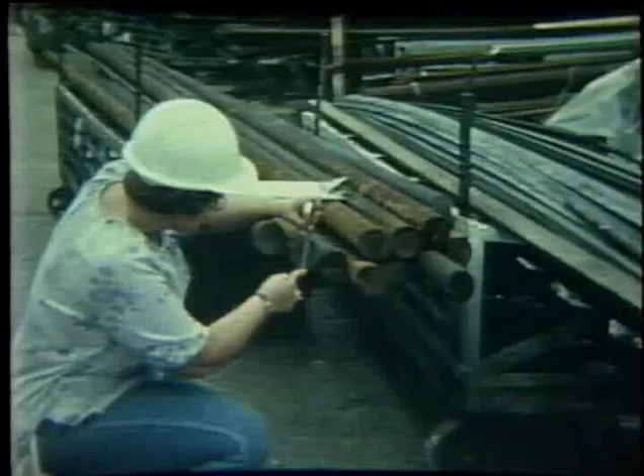Weld quality depends on understanding and ensuring that the materials specified for a job are used. The weldability of metals depends on many factors, which include physical properties, alloy content, welder appeal, and the ability to meet the specified service requirements. Because of these, it is important to be able to identify the types of metal before they are used in fabrication. Let's look at a piece of bare metal.

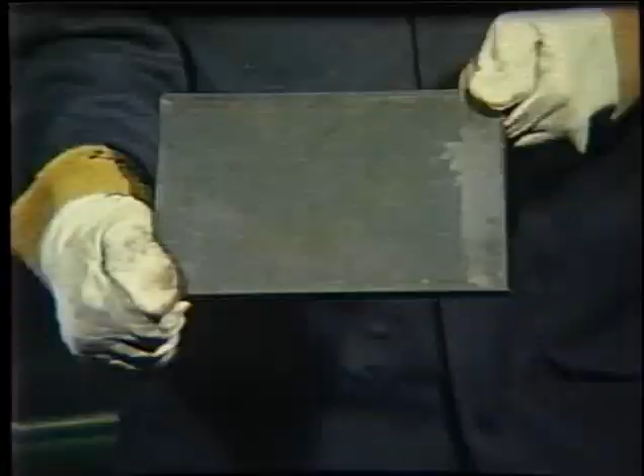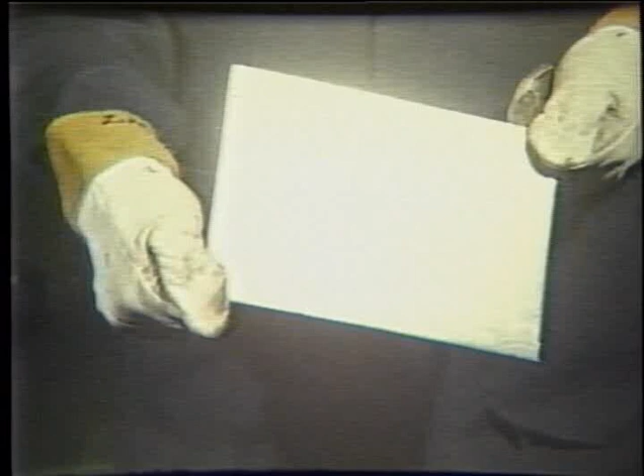It may appear brownish and dull, or it may appear grayish and shiny. Color is one of the physical properties of a metal. Now, lift a piece of metal. It may seem to be either heavy or light. This property is referred to as its density. A bar of steel is more dense than a same-sized bar of aluminum, and is therefore heavier.

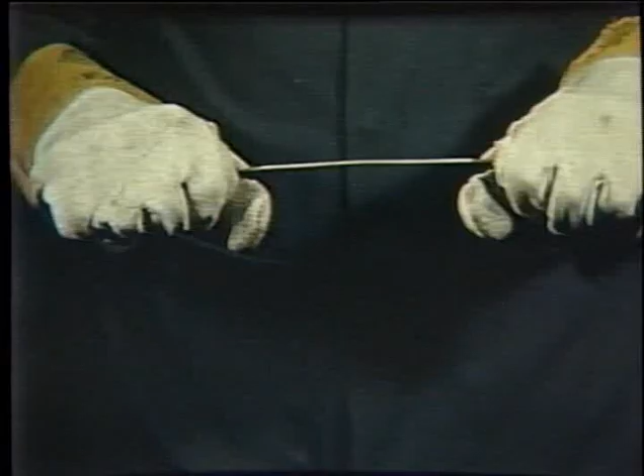Now, try to bend a thin piece of metal. It may bend with little effort, or it may resist bending. The ability to bend or twist without breaking is known as ductility. Metals have many other properties which help to classify them, but for the purpose of this discussion, we will concentrate on the mechanical and chemical properties of weld and base metal.

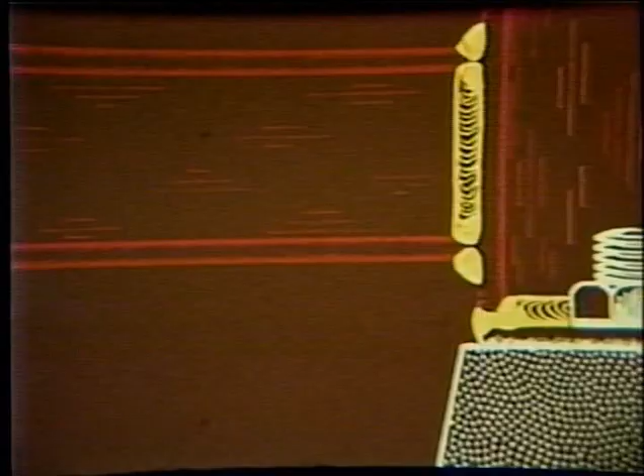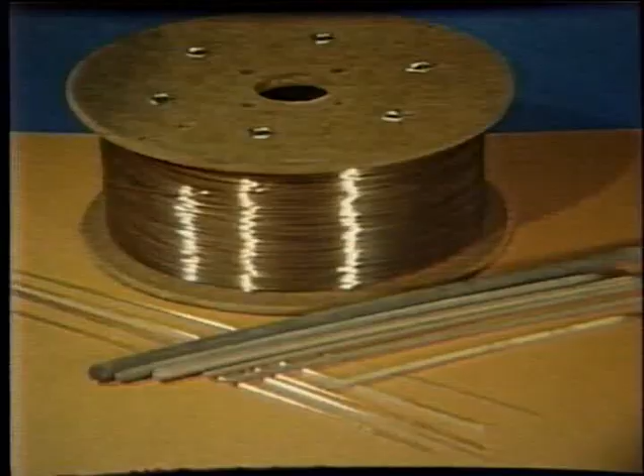Mechanical properties determine the behavior of metals under applied loads. These include tensile and yield strength, ductility, and impact strength. These properties are critical to the overall quality of a weldment. If any are not in conformance to the design requirements, then weld or base metal failure can occur. Because of this, it is important for the engineers to first verify the type of base metal and then select a suitable match of filler material. The Quality Control Department then makes sure that the specified materials are used.

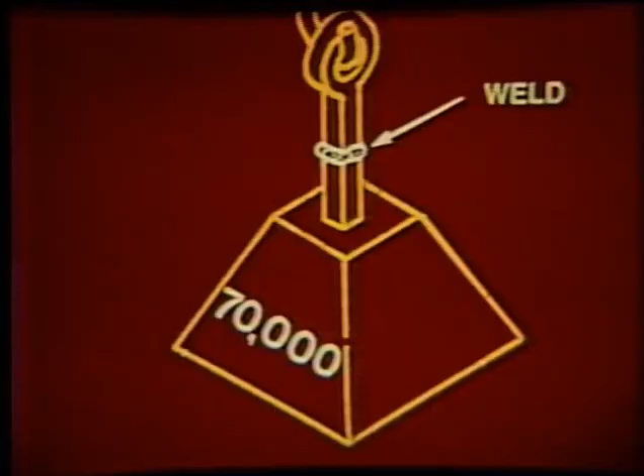The minimum tensile strength of a metal is the greatest normal load per unit area that a material can withstand without failure. This minimum tensile strength is normally stated in terms of stress. Stress is equal to the force, in pounds, applied to the specimen and divided by the cross-sectional area in terms of square inches.

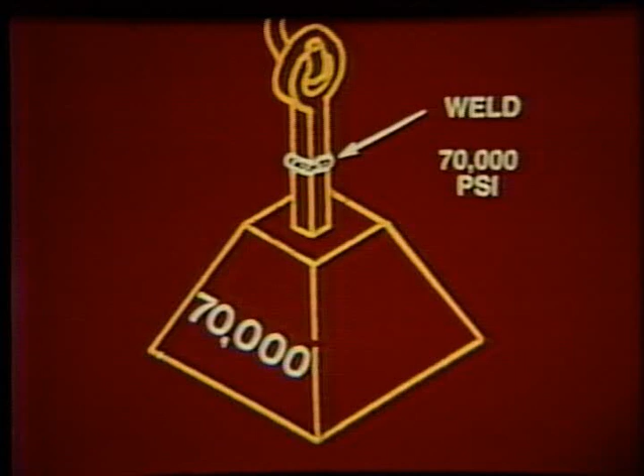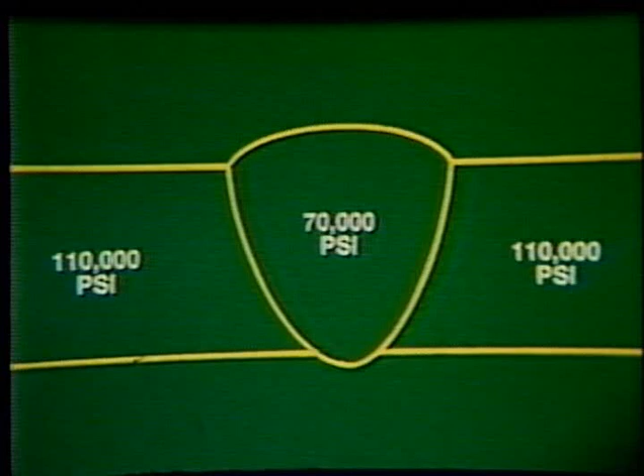Tensile strength is measured in thousands of pounds per square inch and is important to know when selecting a filler metal, since the use of an incorrect filler is the most likely cause of weld metal-related defects. For example, if a weld has a tensile strength of 70,000 pounds per square inch, but the base metal's tensile strength is 110,000 psi, then the weld is obviously weaker and prone to failure at loads over 70,000 psi.

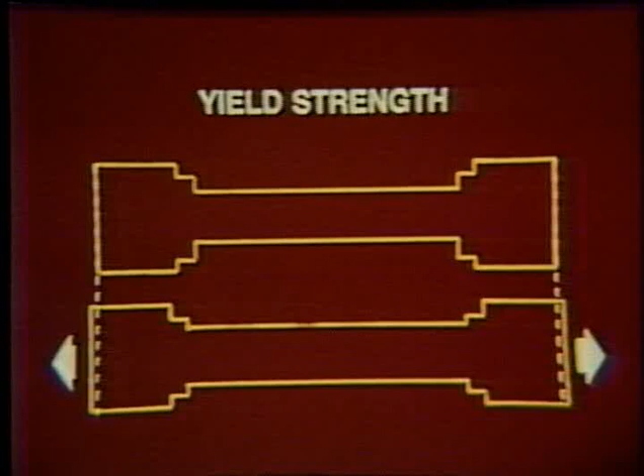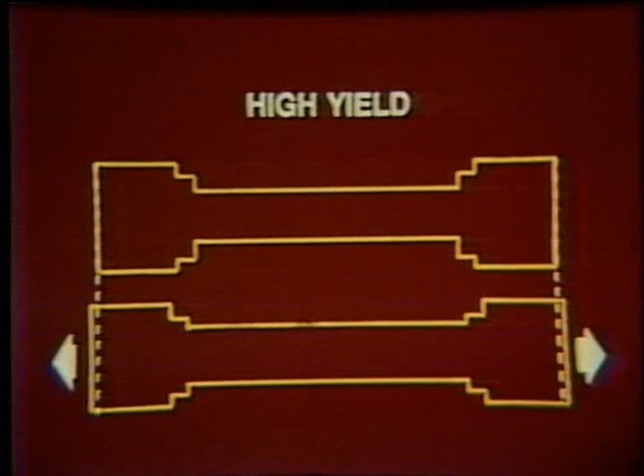Yield strength is also a measurement in pounds per square inch in which a material under load exhibits a measurable, permanent elongation. Metals with high yield properties have the ability to be forced or stretched out of alignment and return to their original shape once the load is released. A submarine is a good example of a weldment needing a high yield hull in order to withstand the pressures and stresses of the deep.

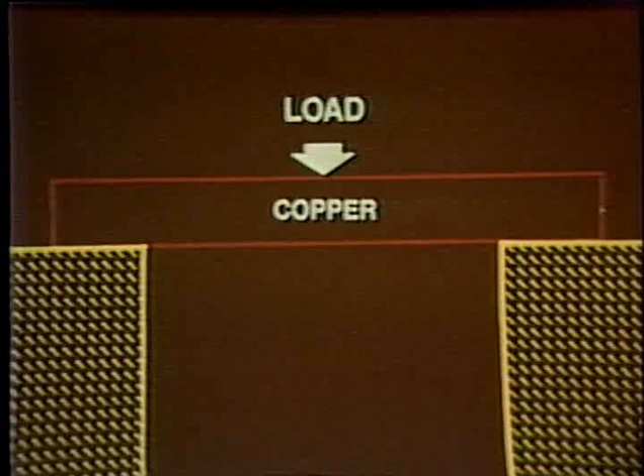Ductility refers to the ability of metals to stretch, bend, or twist without cracking or breaking. A metal with high ductility, such as copper, will fail or break gradually as the load on it is increased. A metal of low ductility, such as cast iron, fails suddenly by cracking when subjected to heavy loads.

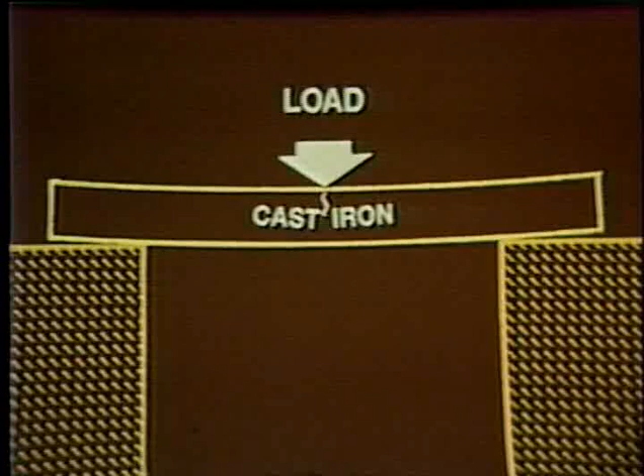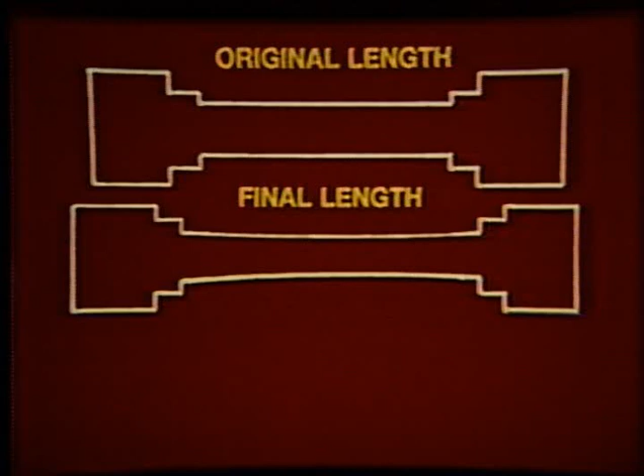The ductility of a material can be expressed as a percent of elongation, that is, a percentage based on the difference between a material's original length and its final length after subjection to a pulling stress. The percentage of elongation can be obtained by subtracting the original length from the final length and dividing the difference by the original length. This result is then multiplied by 100.

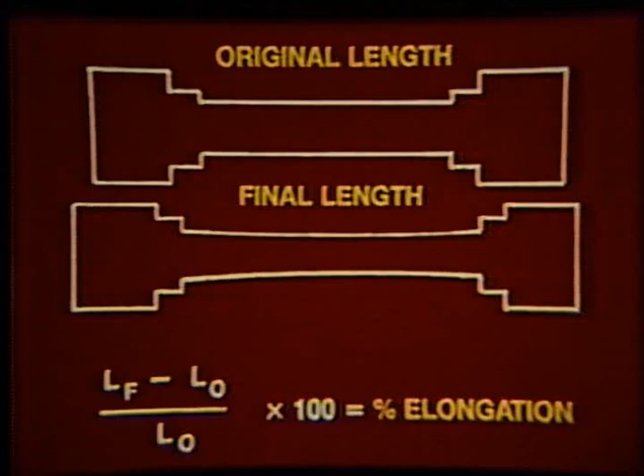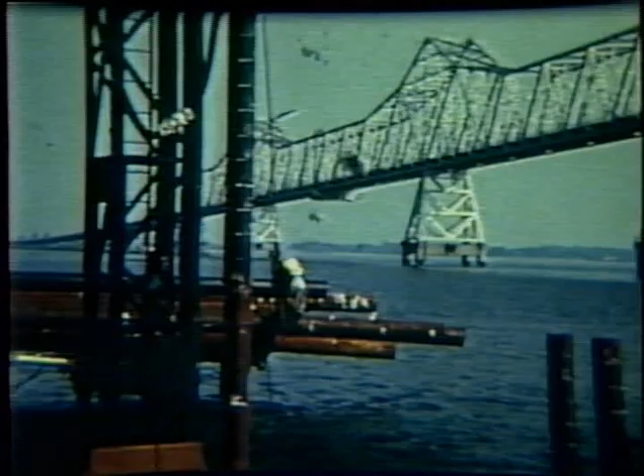Impact strength means, as the name implies, the ability of a material to withstand sudden high-load shock at varying material temperatures without failing. It is also called toughness property. A bridge is a good example of a weldment needing a specific impact quality in order to withstand sudden loads of traffic and weather conditions.

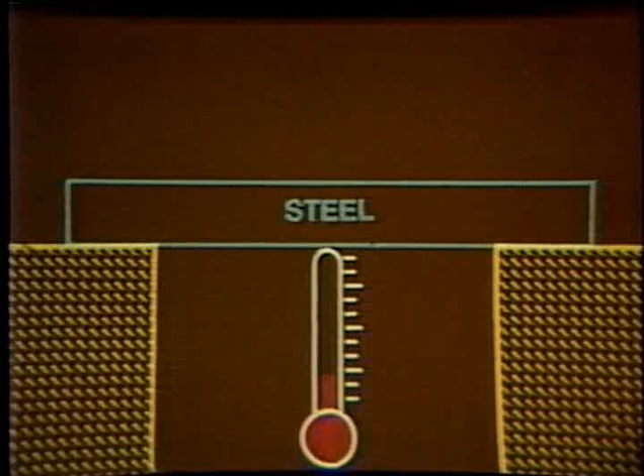Some materials, such as steel, lose toughness properties at low temperatures. These materials will behave in a brittle fashion when subjected to an impact energy. Base and filler metals are tested to determine their toughness properties, which are specified in terms of foot-pounds at degrees Fahrenheit. For example, 20 foot-pounds at minus 20 degrees Fahrenheit. A material specified as having this toughness property can be used in applications as low as minus 20 degrees Fahrenheit where impact loading is required.

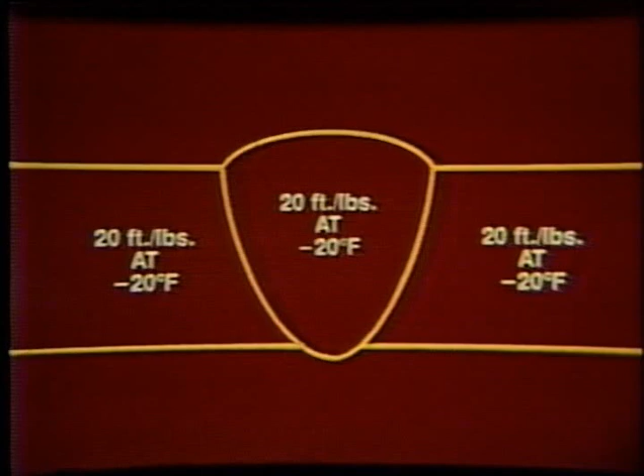Filler metals must match the base metal toughness property to prevent failure at low temperatures. If a weld has an impact quality of 42 foot-pounds at minus 20 degrees, but the base metal quality is 101.5 foot-pounds at the same temperature, this weld would be weaker and prone to failure at low temperatures.

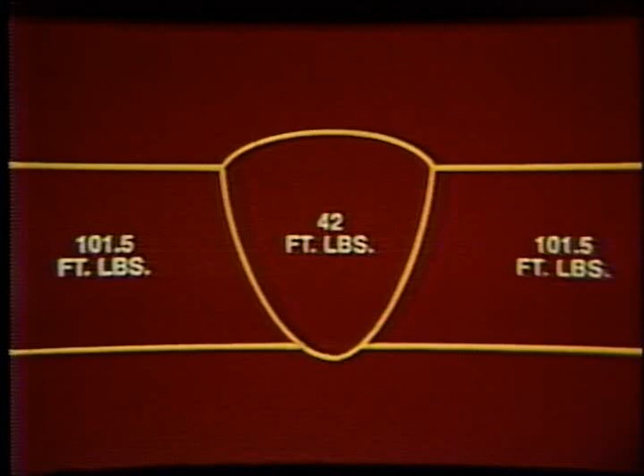Besides mechanical properties, metals also have chemical properties, which refer to the presence of additional elements, such as carbon, silicon, phosphorus, nickel, sulfur, chromium, and so forth. The nature and amount of these substances can affect the performance of the material. For instance, a steel with a high content of nickel and chromium, such as stainless steel, has the property of corrosion resistance, which hinders oxidizing and rusting. Chemical plants, food processing industries, nuclear power plants, refineries, and offshore oil platforms are typical users of corrosion-resistant metals.

Therefore, it is important to ensure the proper match of base and filler metal. An improper match may create insufficient strength and inadequate corrosion resistance, such as welding a 400 series stainless steel with a 300 series filler metal. The mechanical and chemical properties of both could differ enough to cause the weld to fail.

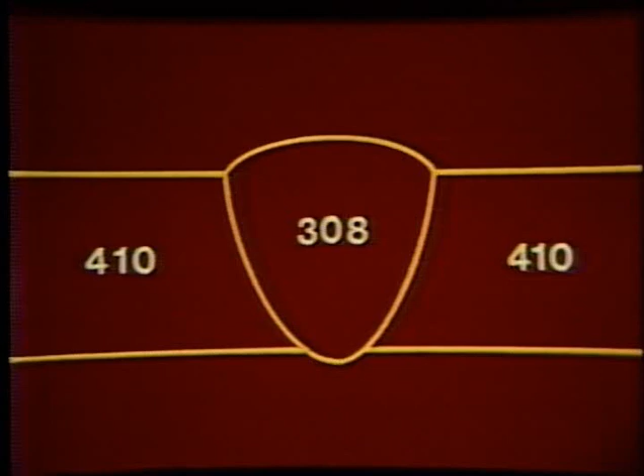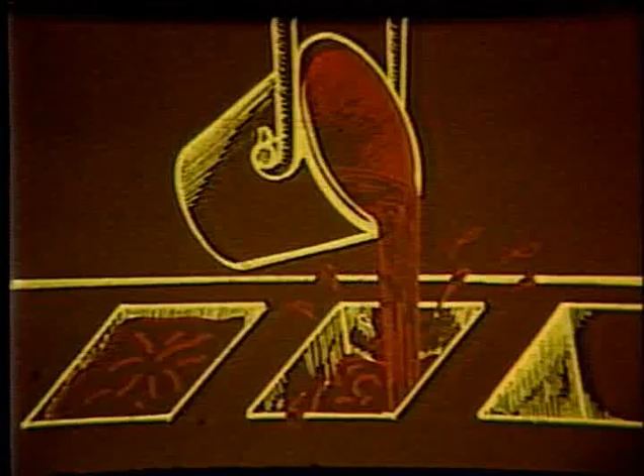As mentioned earlier, verifying the type of base metal to be used is important, but it is equally important to inspect the material for any structural type flaws. They should be inspected for such things as laminations, seams, and laps, as well as rough surface conditions and tears. These discontinuities originate at the steel mill when the iron ore and alloys are melted in the blast furnace. From the furnace, the iron becomes solid ingots with some non-metallic inclusions and porosity. It is these inclusions that cause laminations, seams, and laps once the iron is worked.

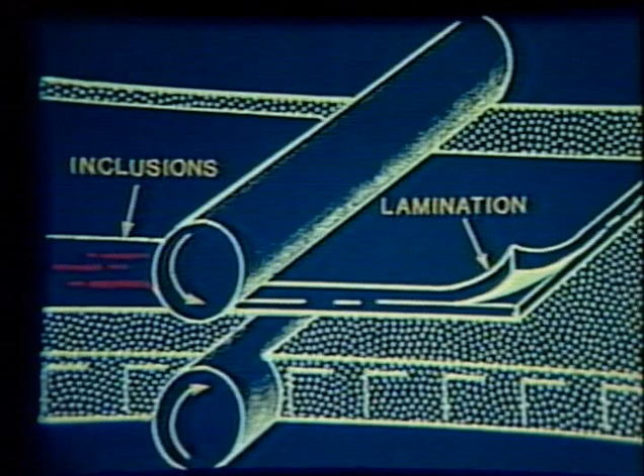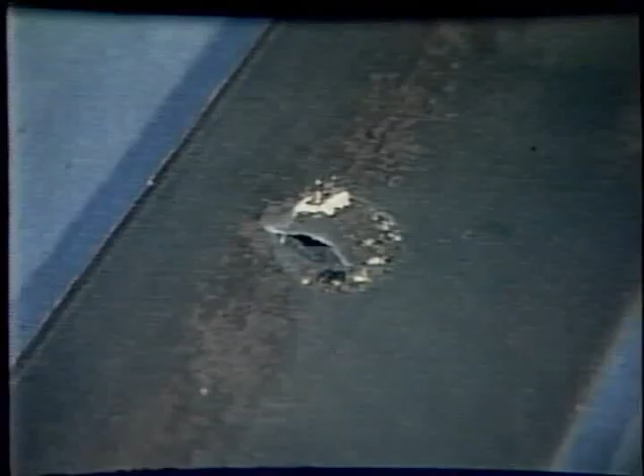Metals with any of these flaws should be repaired prior to use or replaced if any of the discontinuities exceed allowable limitations. Rough surface conditions such as pits, gouges, or tears should also be inspected to see if the material is usable or not.

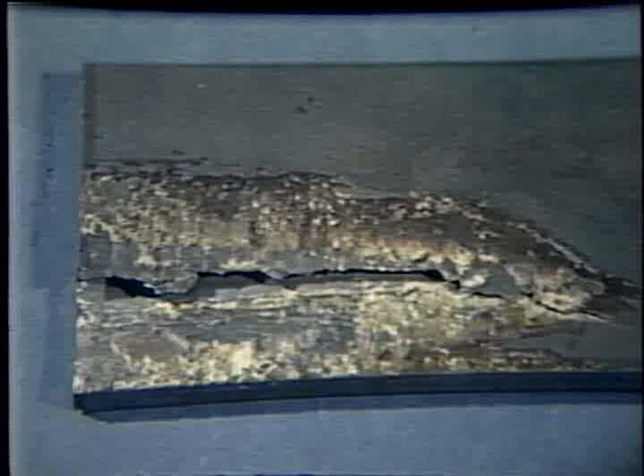There are many parties involved in the control of materials. The design engineer is the one generally responsible for specifying what type of materials are to be used in accordance with the service requirements of the finished product and the applicable codes. The welding engineer provides the purchasing department with the requirements for filler materials. The purchasing department then prepares the purchase order based on the requirements of the welding engineer.

The weld inspector is now responsible for verifying that the specified materials are indeed being used, and also provides feedback of any discrepancies to the welding engineer. For example, when an improper filler metal has been received.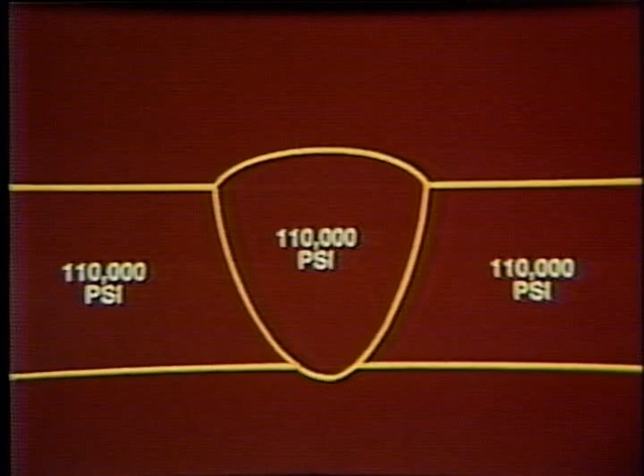Communication of filler metal information through standard specifications is essential for obtaining suitable weld metal properties. Filler material properties such as strength, ductility, impact, and corrosion resistance should be considered when selecting a filler. As a rule, the strength of the deposited weld metal should match or slightly exceed that of the base metal.

There are several criteria governing the proper selection of a filler metal. These are base metal mechanical properties, base metal physical properties, base metal chemical composition, and service conditions and specifications. All of these must be considered collectively when selecting filler metal.

The American Welding Society has published a series of specifications that govern filler metal mechanical and chemical properties, methods of manufacture, storage, and classification. These specifications range from A5.1 through A5.30. An example would be A5.5, which covers the specifications for low alloy steel electrodes. The American Welding Society's classification system makes it relatively simple to select proper filler metals.

For example, a typical shielded metal arc electrode might have a classification number such as this. The first letter E refers to electrode. The next 2 or 3 numbers indicate the minimum tensile strength of the weld deposit in 1,000-pound increments. In this case, 80,000 pounds per square inch. The next digit refers to the position capabilities of this electrode.

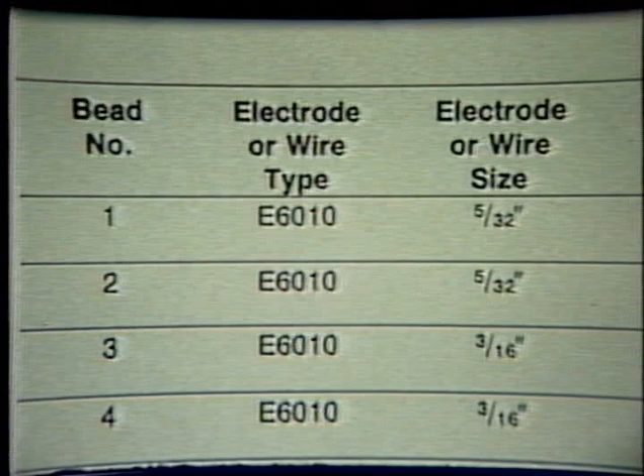And the suffix indicates a particular classification based on the chemical composition of the weld as deposited, the shielding gas to be used, and the usability of the electrode for single or multiple pass applications. The welding procedure should list the proper filler metal to use by the American Welding Society specification and classification numbers.

As mentioned earlier, the use of an incorrect filler metal is probably the most common cause of weld-related defects. Whenever the properties of the filler metal differ from those of the base metal, the quality and overall strength of the weldment can be affected. It is the responsibility of the Quality Control Department to assure that the specified materials are being used.

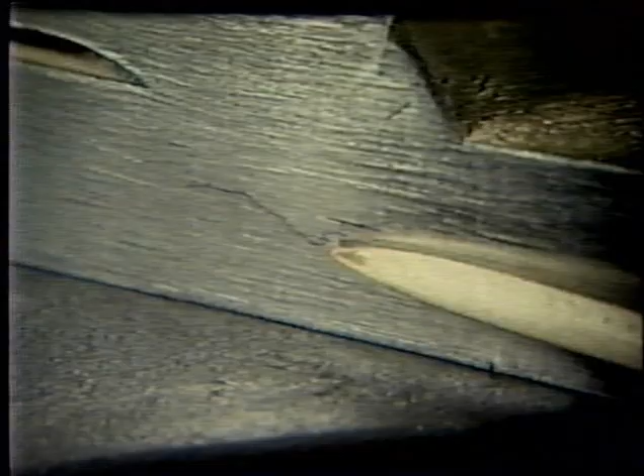Weld quality control does not stop with the verification of base and filler materials. In fabrication, conditions still exist that can bring about failure of the weld and base metal. Conditions including lamellar tears, excessive spatter, and arc strikes can occur in or on the base metal during welding operations. Lamellar tears are most common in heavier weldments.

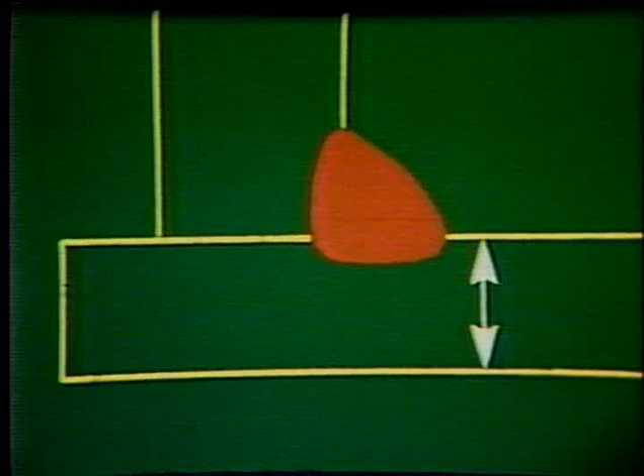They are separations found within or beneath the heat-affected zone. They occur when the through thickness of the plates cannot withstand the pulling effect of the shrinking weld during cooling. Lamellar tears generally occur in areas of the base metal where inadequate refining is present.

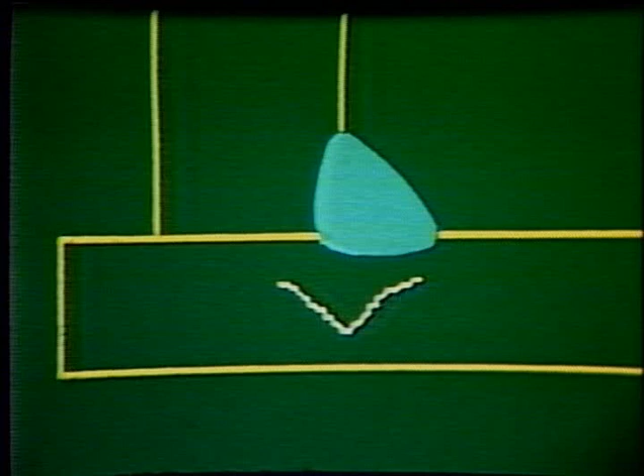To minimize or prevent lamellar tearing, ensure careful inspection of the materials prior to welding. Make sure that the welding procedure is being followed, and attempt to design joints so that shrinkage stresses are brought more in line with the work direction of the material.

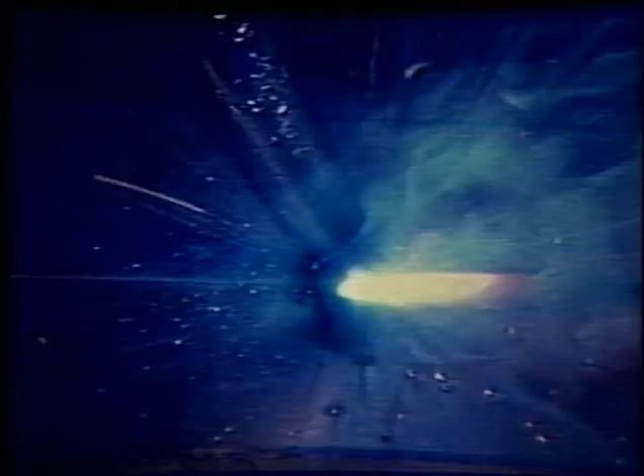Excessive weld spatter is a common appearance problem associated with welding processes in which metal transfers through the arc. It appears as metal particles which do not become a part of the weld, but adhere to the weld and base metal at random. Spatter does not affect the strength of the weld, but does produce a poor appearance and increases final cleaning costs.

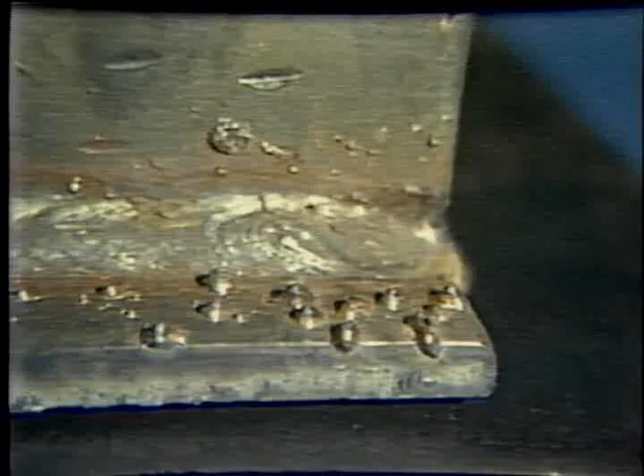Excessive spatter can be controlled if the current and voltage is kept within the recommended range for the type and size of electrode, if the correct polarity is used, the proper arc length maintained, and arc blow is reduced.

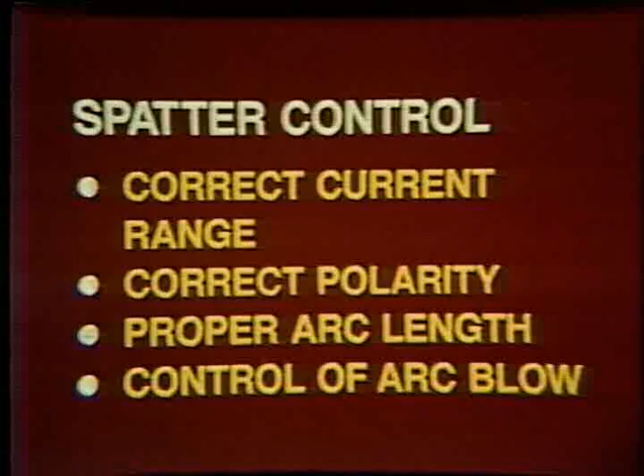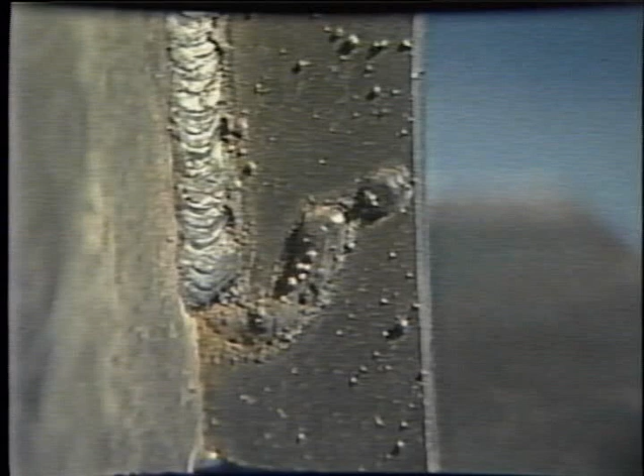As mentioned in earlier topics, arc strikes are a remelting and changing surface profile resulting from an arc. They generally occur outside the intended weld area and can be caused either by the welding arc or by an improperly secured ground connection. Arc strikes create small, localized areas of remelting, hardening, and undercutting, which can lead to the formation of cracks, depending on metal composition.

To prevent arc strikes, assure that the ground connection is secured tightly to the work, and take care to strike and break the arc only in the intended weld area.

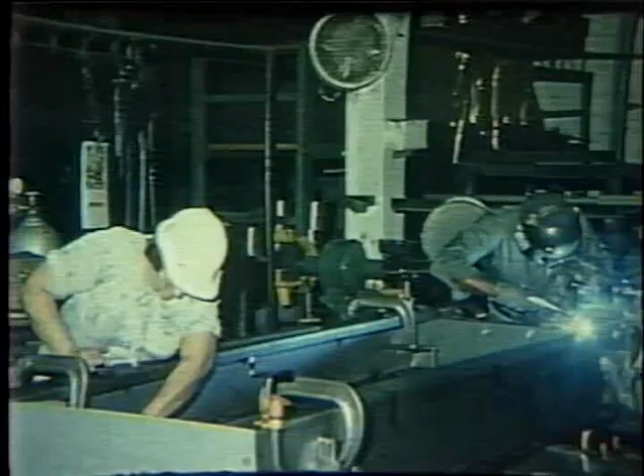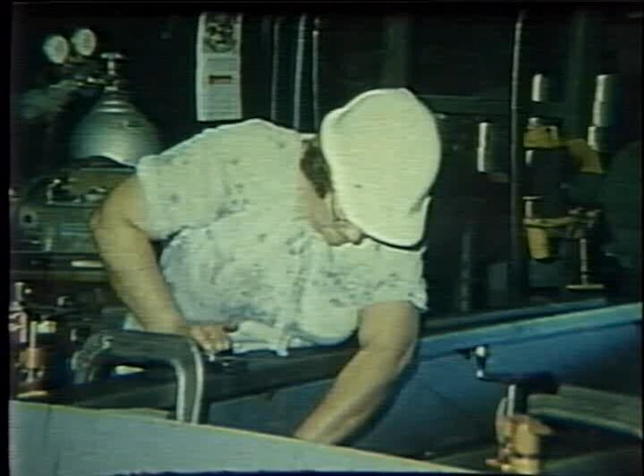Keep in mind that weld discontinuities always exist, but may not always be defects. Quality control personnel must locate discontinuities and decide whether they are acceptable or are defects. The use of proper tools, knowledge of the size and location of defects, and reference to the code or specification for the job will aid in making these decisions.